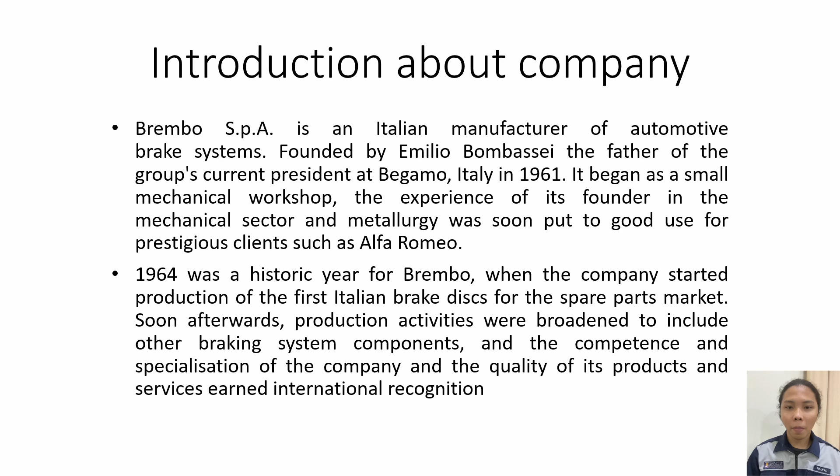Its successes include the production of the first complete braking system installed as standard on Guzzi and Laverda motorcycles in 1972, the Formula 1 supply for Ferrari in 1975, the first aluminium caliper and the first carbon disc in the 1980s. So basically, Brembo is the first company that managed to produce the first aluminium caliper and the first carbon disc during the 1980s.

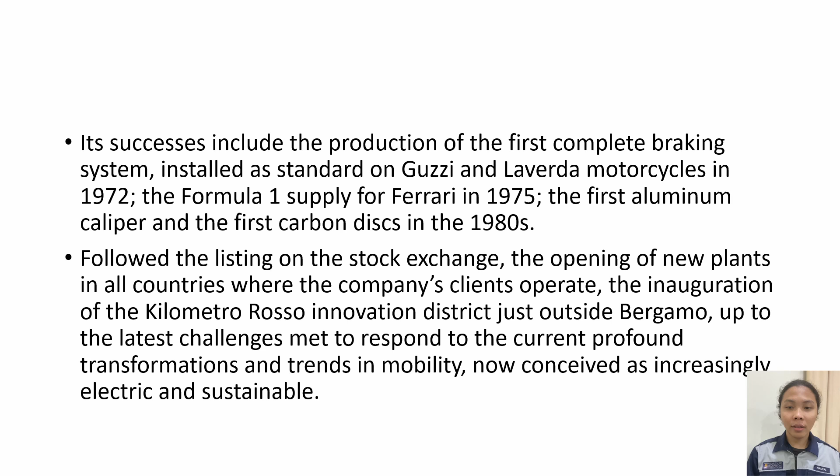It's a good achievement. And then followed the listing on the stock exchange, the opening of new plants in all countries where the company's clients operate, the inauguration of the Kilometro Rosso Innovation District just outside Bergamo, up to the latest challenges met to respond to the current profound transformation and trends in mobility, now conceived as increasingly electric and sustainable.

And then here's another one: the company's new plant in Escobedo in the state of Nuevo Leon, Mexico. The new manufacturing site in Escobedo is a real turning point for Brembo operations globally, following its global strategy of localizing product and process innovation, service and cooperation close to its customers. Brembo continues to distinguish itself from other suppliers.

Escobedo is one of the company's more modern and cutting edge aluminium caliper plants. The facility features state-of-the-art manufacturing processes that combine high efficiency with the latest technically integrated solutions.

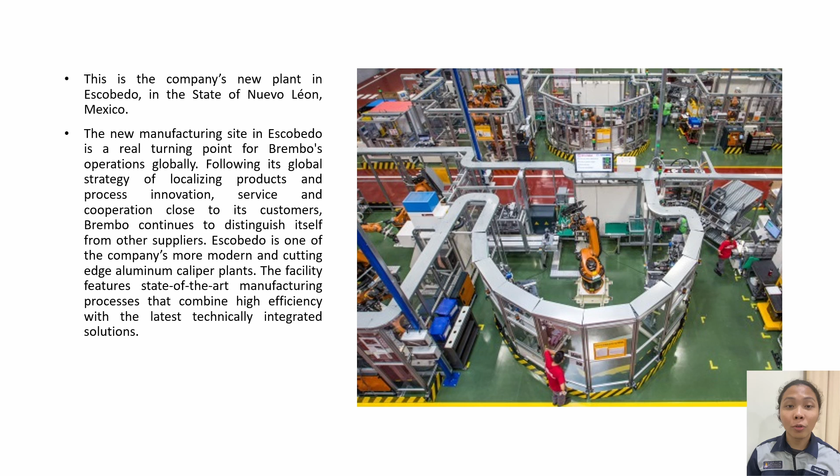So Brembo designs and manufactures each individual part of the braking system. Brembo brake discs are the industry benchmark for innovation and quality. Brembo calipers embody state-of-the-art design and performance, and Brembo brake modules offer unparalleled integration and efficiency for maximum reliability, comfort, and durability. So that's all from my part of the introduction.

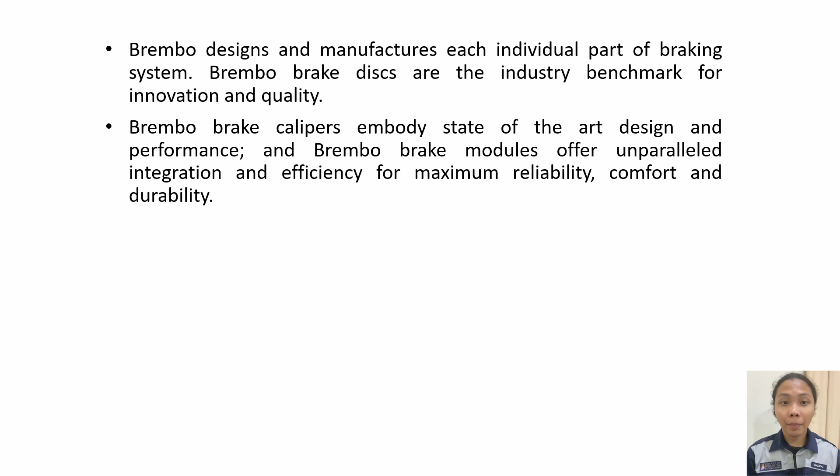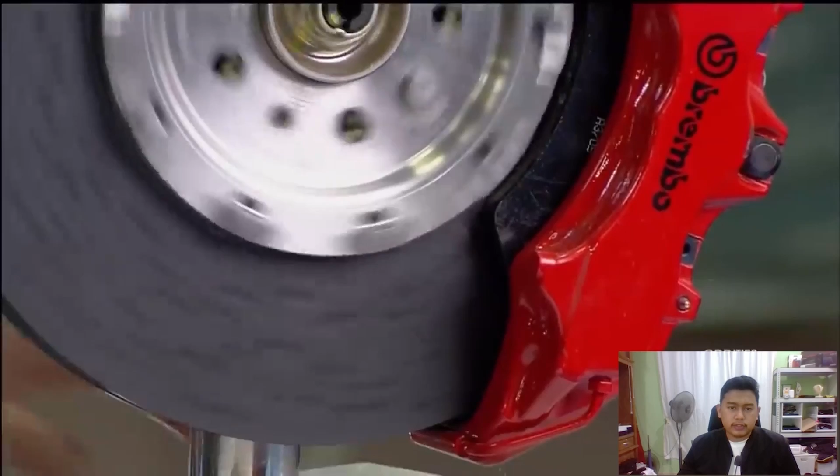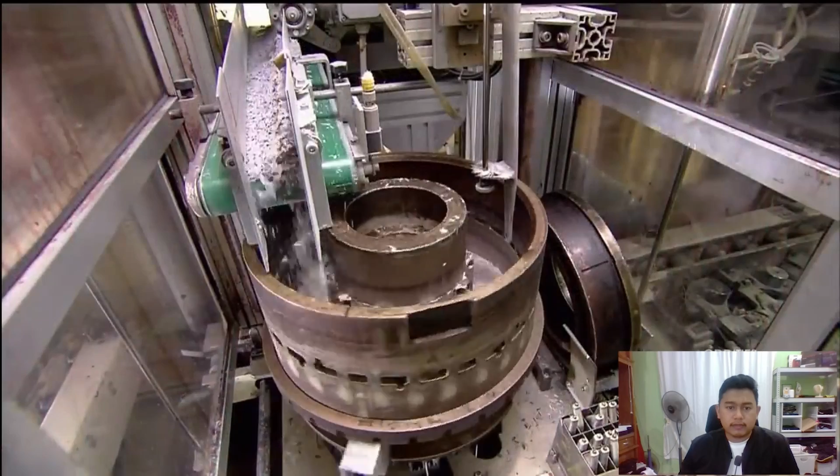Next, I will proceed with our video presentation on the manufacturing process. The first step in the manufacturing process of the Brembo disc brake is that the raw ingredients will be prepared for the mixing process, and the materials involved in this mixing process are heat molded resin and chopped carbon fiber in order to create a high strength composite material.

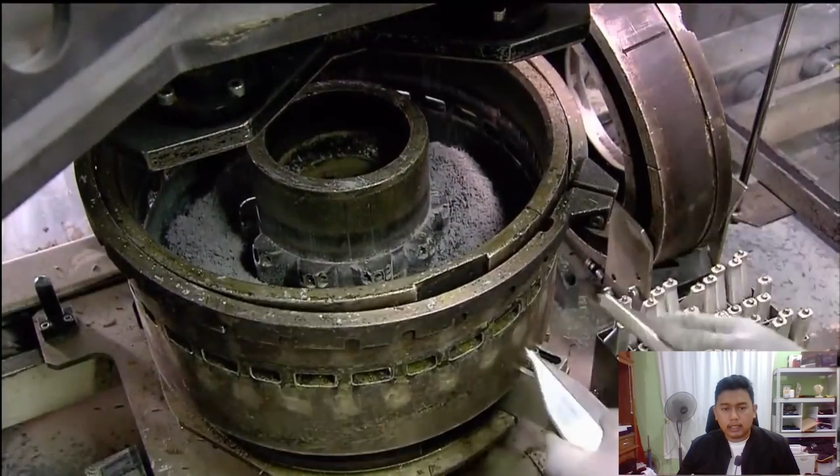The mixed ingredient will then be poured into the aluminium mold until half of it, and after that the half filled mold will have a slotted belt installed around it, and then aluminium cores will be inserted into the slots, and the cores function for ventilation purposes. Next, the remaining space of the cavity will be filled again with the mixed ingredient, and at the same time a roller will be placed on top of the cavity to level out the ingredient.

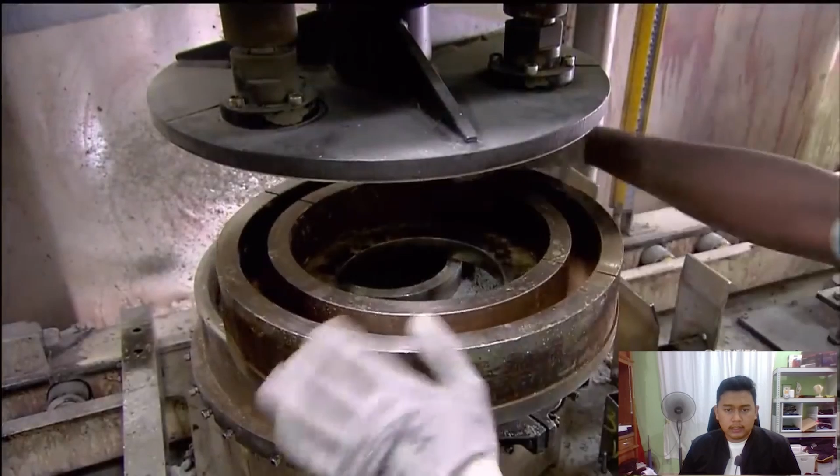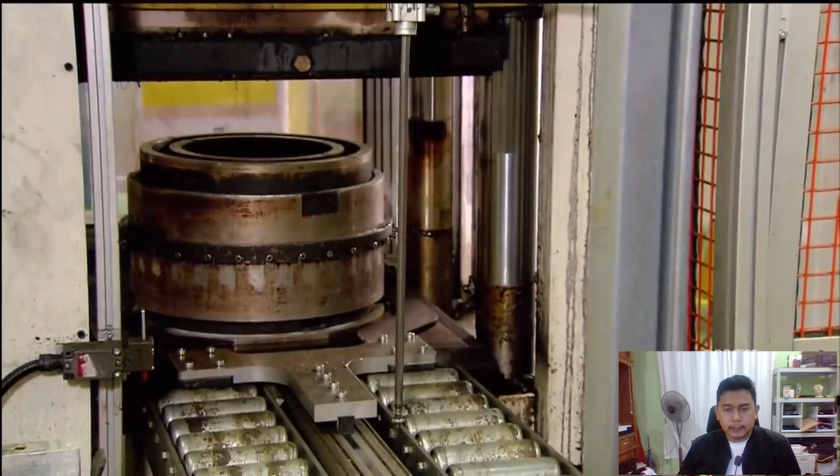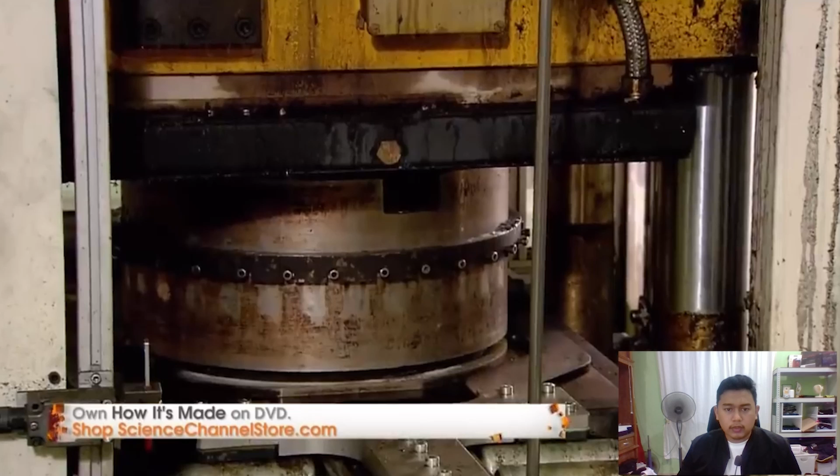After that, the mold is closed and pressed lightly to compact the fill before entering a larger press, which will apply 20 tons of pressure, and at the same time the mold will undergo a heat treatment up to 204 degrees Celsius. This particular step will transform the resin powder into plastic and compact the carbon fiber, and then the mold is cooled until it is ready for the extraction process.

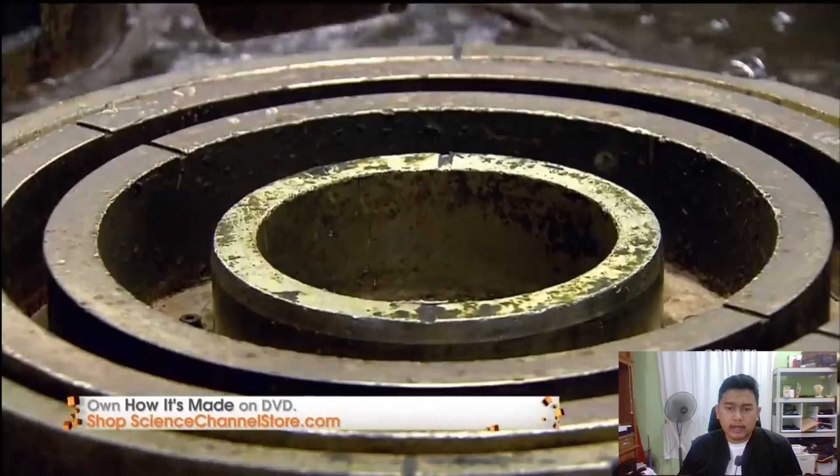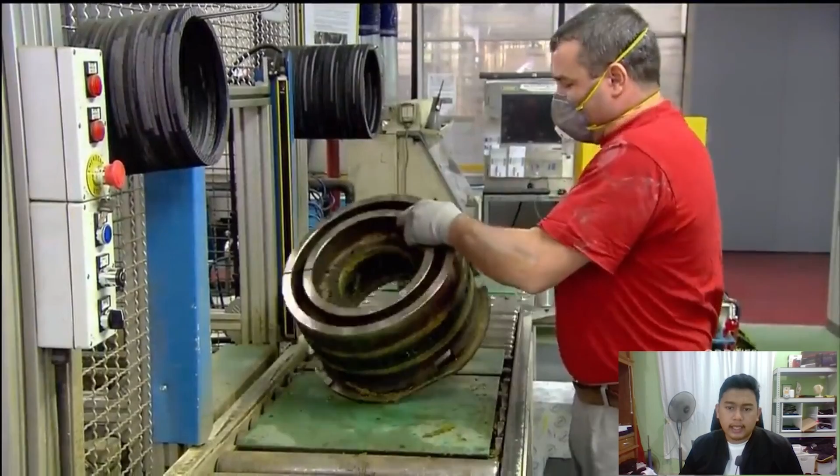Before extracting the disc, the mold will be submerged in water for 5 to 8 minutes to ensure that the disc is completely cooled down, which will enable the workers to pull out the core. So the next step will be continued by SAUFI.

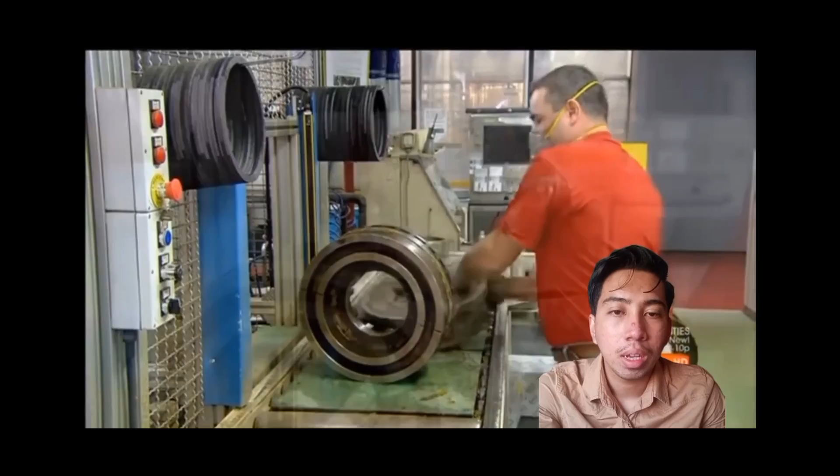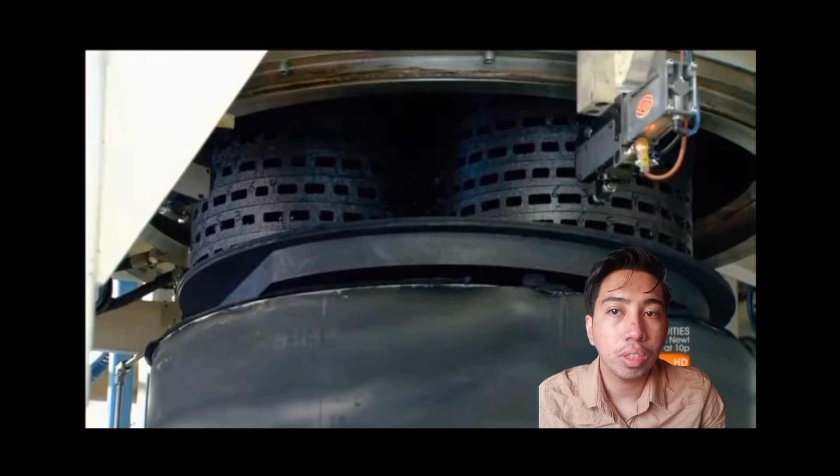After the disc is removed from the mold, a computer guided machine will smooth out the rough areas. The tiny ventilation holes will also be drilled to make a perfect hole. After that, the disc ring will be heated in an oven with a temperature over 1800 degrees Fahrenheit for over 2 days. This process will change the plastic into carbon.

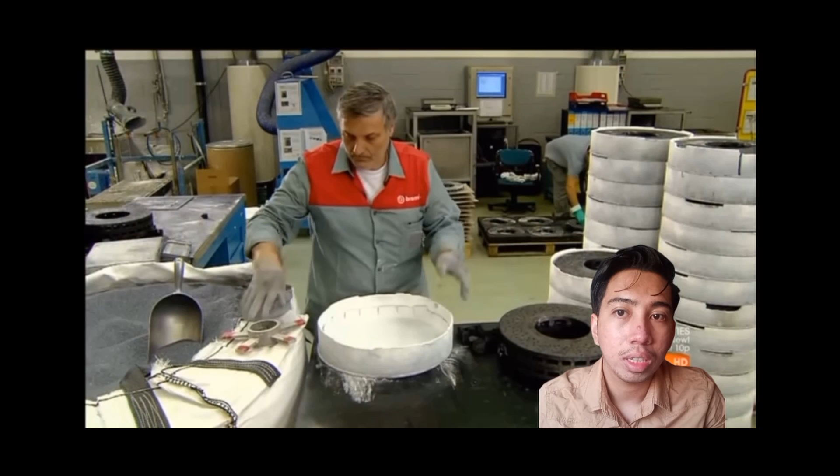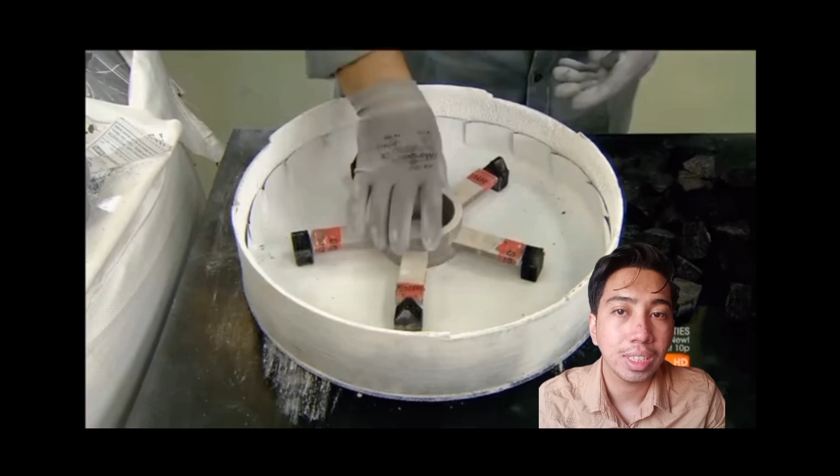Next process, a crucible that has a high heat resistance is put on the table, and then 5 mounts are placed inside the crucible. The disc ring will be placed on the mount.

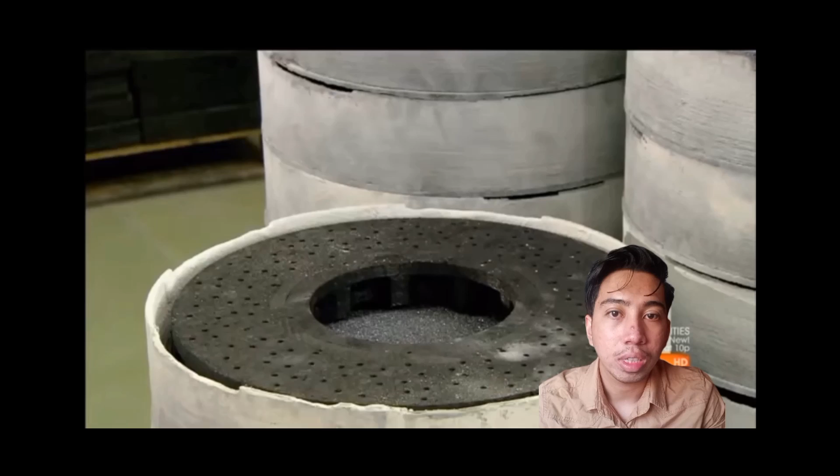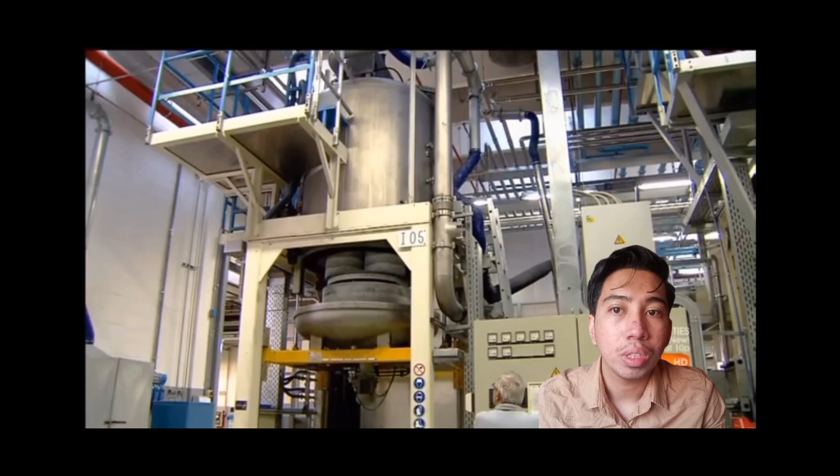Next, the ceramic material, which is a fine silicon powder, will be poured into the middle of the funnel. After that, the crucible will be heated in the oven that has temperature over 3000 degrees Fahrenheit for over 24 hours. This process is called a melting process because this process will melt the silicon powder to produce a silicon carbide.

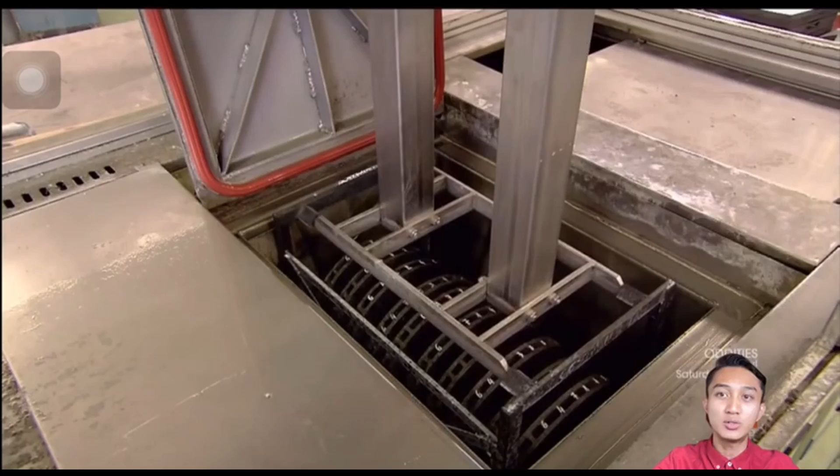For finishing process, the brake disc goes into paint coating process. The product goes into a chamber and receives a coat of protecting paint. The paint protects the carbon from oxidizing because at high heat, oxygen burns carbon and this will destroy the product.

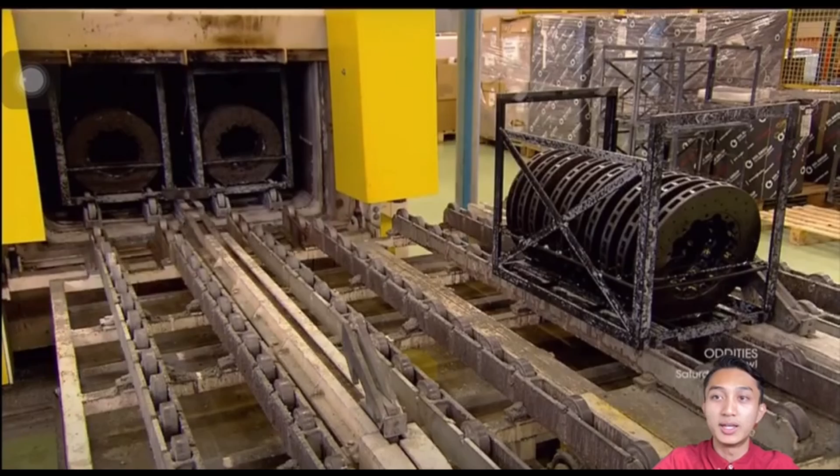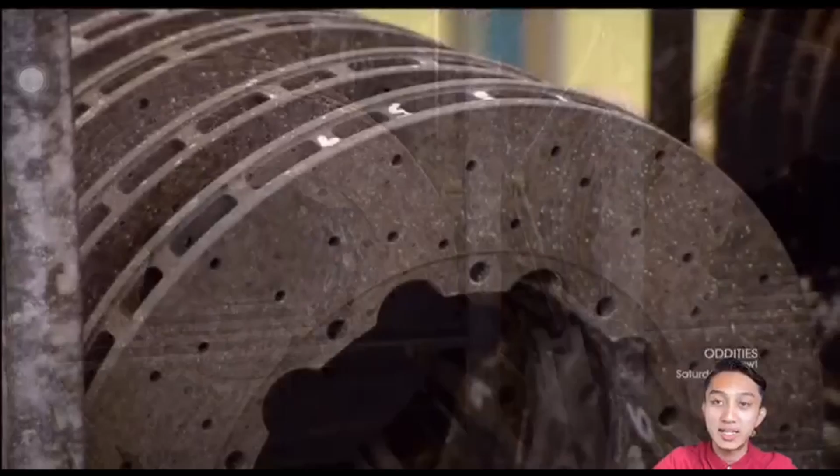Next, the Brembo disc brake goes into antioxidation treatment. The purpose of the treatment is to extend the life of the disc brake. Lastly, the disc brake goes into a sanding process performed to clean white residue on the brake disc.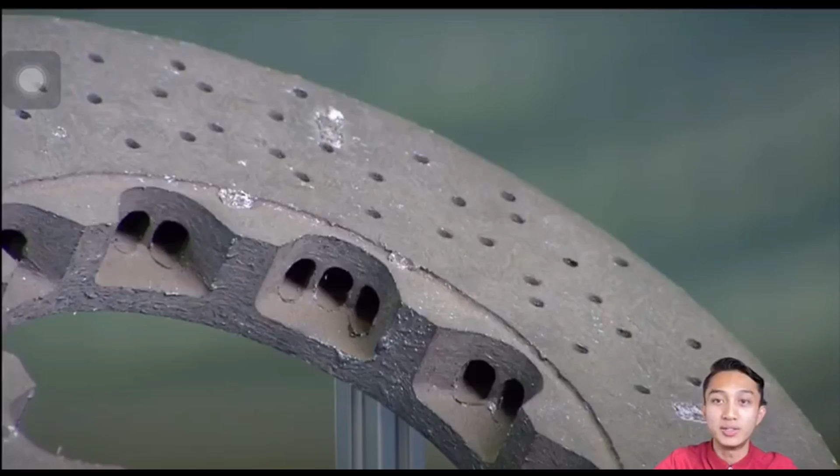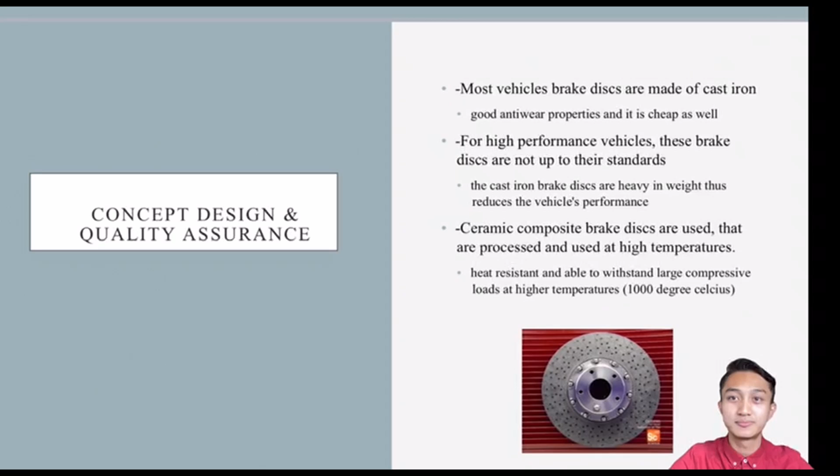For design concept and quality assurance. In most vehicles, these brake discs or disc rings are made of cast iron, which is cheap. But in certain other cases, such as high-performance vehicles like Formula 1, these brake discs are not up to the standards of high performance because the cast iron brake discs are heavy in weight and so reduce the vehicle's performance to a particular extent.

In such a case as this, ceramic composite brake discs are used that are processed and used at high temperatures. These ceramic composite brake discs are known to be heat resistant and able to withstand large compressive loads at higher temperatures up to 1000 degrees Celsius.

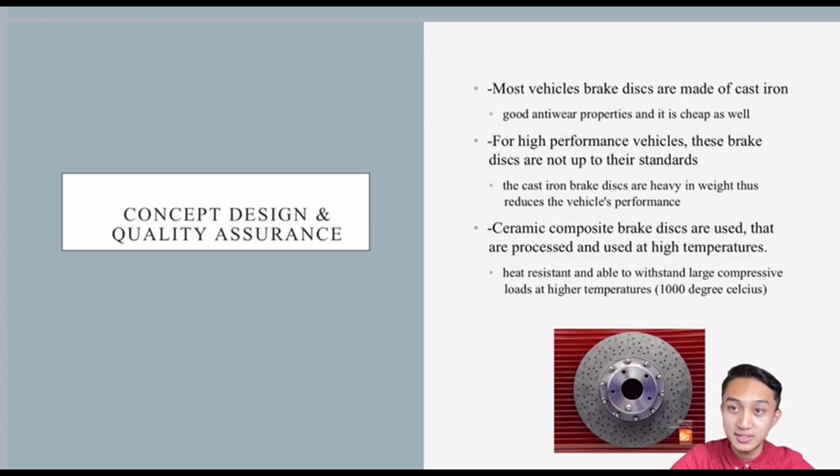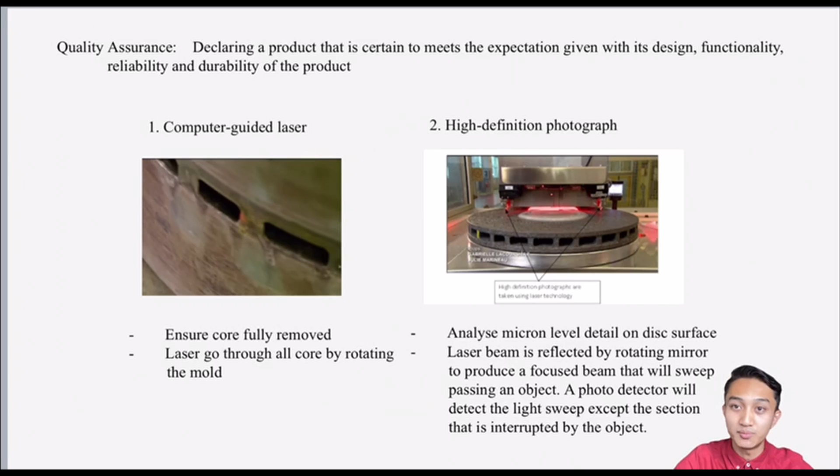Quality assurance is declaring a product that is certain to meet the expectation given with its design, functionality, reliability, and durability. In order to achieve all those goals, Brembo uses a computer-guided laser to ensure the core is fully removed. The mold rotates on a rotating machine and the laser will pass through the side of the rim in a static condition and will detect the presence of the core.

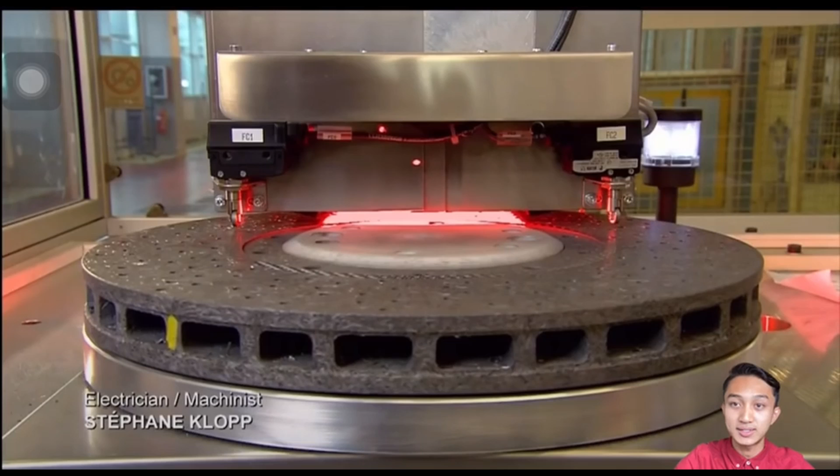All the core slots should be empty as it will go to the next manufacturing process, which is extracting the mold. High-definition photography is also used at Brembo to analyze micron-level detail on the surface. As a result, the surface of the rim will be smooth with no defects. A computer machine will thoroughly inspect the ring surface by taking high-definition photographs to further examine the molecular and crystal structures to detect any defects.

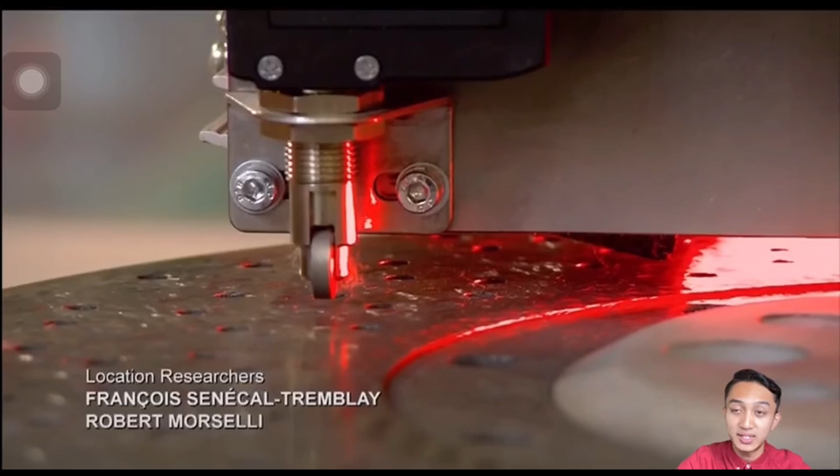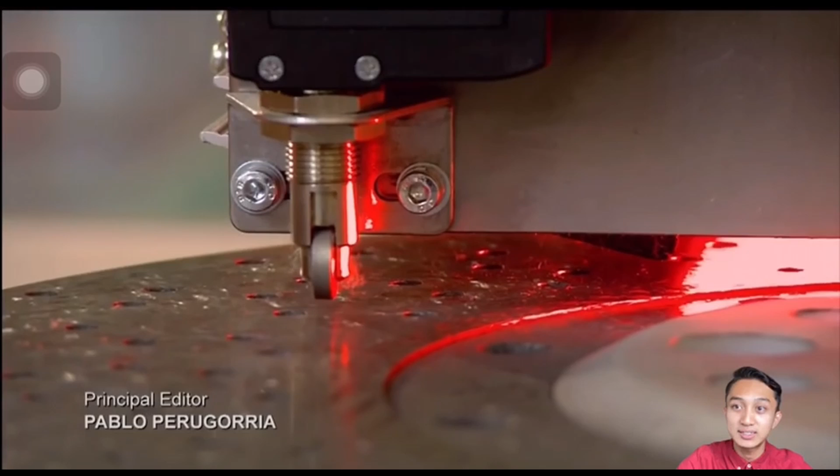How does it work? Well, the laser beam is reflected by a rotating mirror to produce a focused beam that will sweep past an object. A photo detector will detect the light sweep except the section that is interrupted by the object. The interrupted time is measured and related to the size and shape of the object.

Next, the products produced by Brembo. And for your information, Brembo is one of the companies in the world that manufacture equipment relating to braking systems. Hence, Brembo offers their services in designing and manufacturing every individual part in order to ensure that their products can deliver maximum performance and offer excellent reliability and durability.

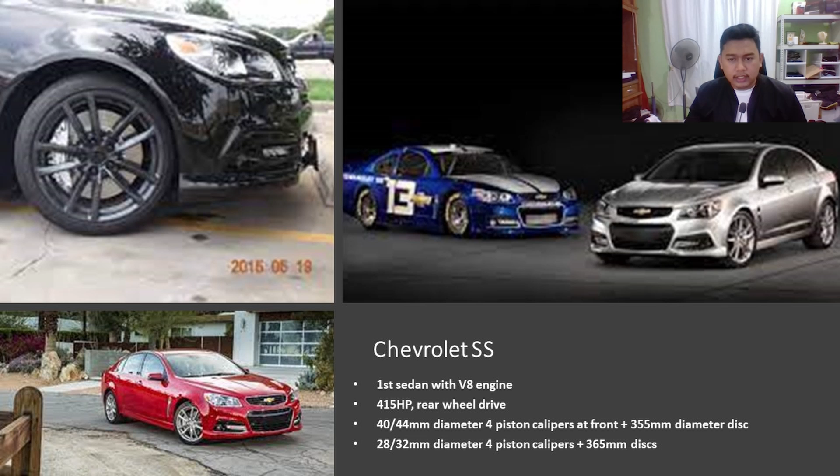At this point, Brembo does not only manufacture products for cars, but also specializes in professional racing and bike braking components. So, here are some of the high-performance cars equipped with Brembo discs and calipers. The first model is the Chevrolet SS, the first sedan with a V8 engine, producing 415 horsepower with rear-wheel drive, and Brembo has produced oversized brakes in order to match the horsepower produced by the Chevrolet SS.

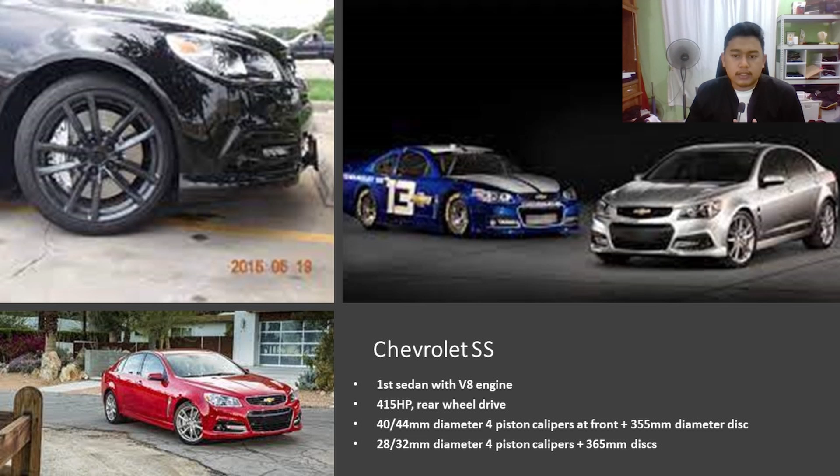For this car, 40 to 44 mm diameter 4-piston calipers are placed on the front to work in conjunction with a 355 mm disc. On the other hand, at the rear wheels, 28 to 32 mm diameter 4-piston calipers will be combined with a large 365 mm disc.

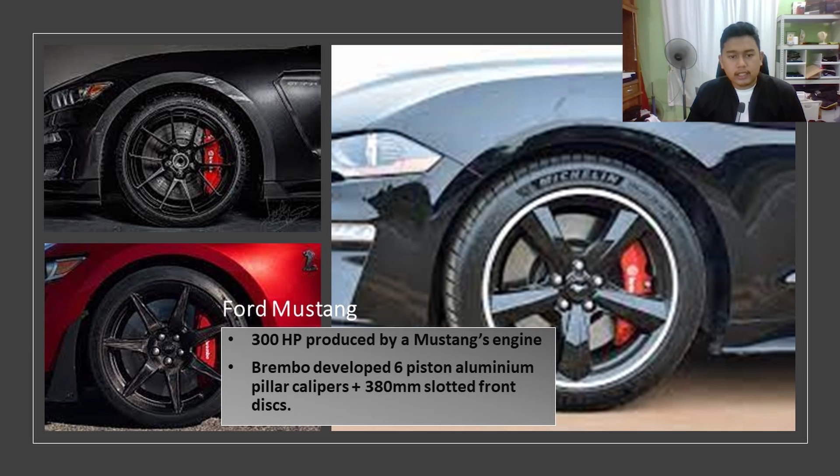The second model is the Ford Mustang, which produces 300 horsepower, and in order to cater to this horsepower, Brembo has developed 6-piston aluminium pillar calipers with a 380 mm slotted front disc.

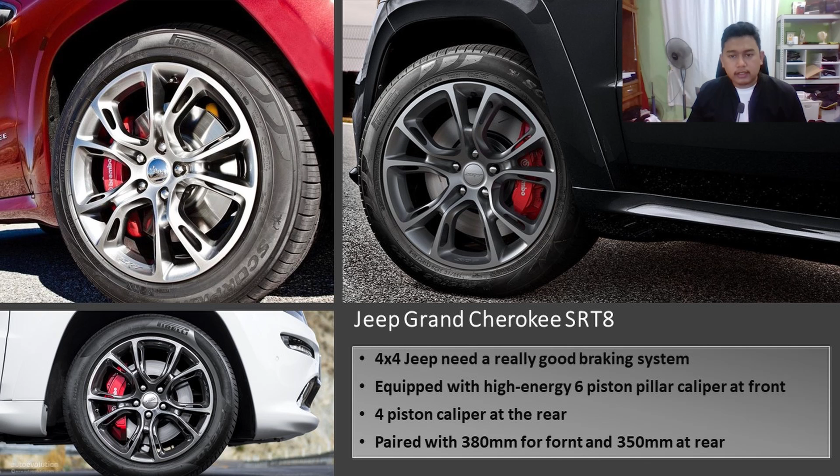And the next is the Jeep Grand Cherokee SRT8. The power generated by this 4x4 requires a really good braking system, so Brembo equipped the car with high energy 6-piston pillar calipers at the front and 4-piston versions at the rear. These calipers are coupled with 380 mm and 350 mm discs respectively. Next, I will show you the bike models for Brembo equipment.

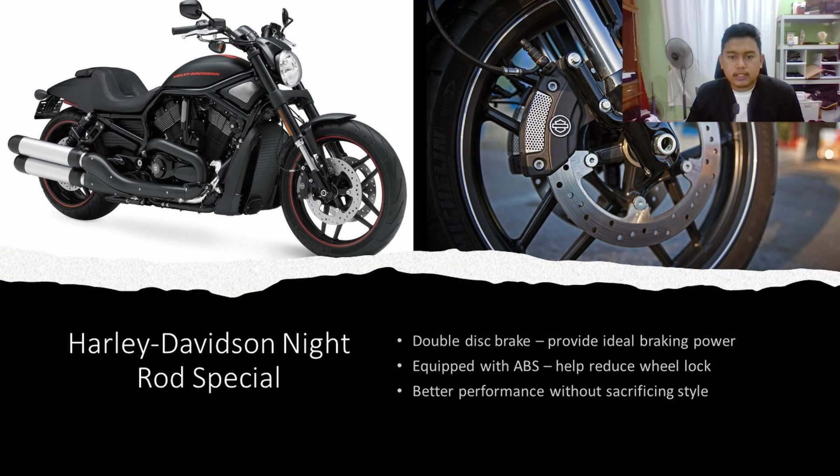And the first model is Harley Davidson Night Rod Special. For this motorbike, they use double disc brakes in order to provide ideal braking power. And the ABS installed will help reduce the tendency of wheel lock in sudden brakes, which gives better performance without sacrificing the style. Next is Kawasaki Ninja H2.

This motorcycle is equipped with 330mm diameter and 5.5 thick semi-floating disc, which will be paired with Stylema calipers. And these calipers consist of 4 pistons, 30mm diameter each. And all of this equipment is to match the 231 horsepower and 310 horsepower for Ninja H2 and Ninja H2R respectively. Next product is for racing equipment provided by Brembo.

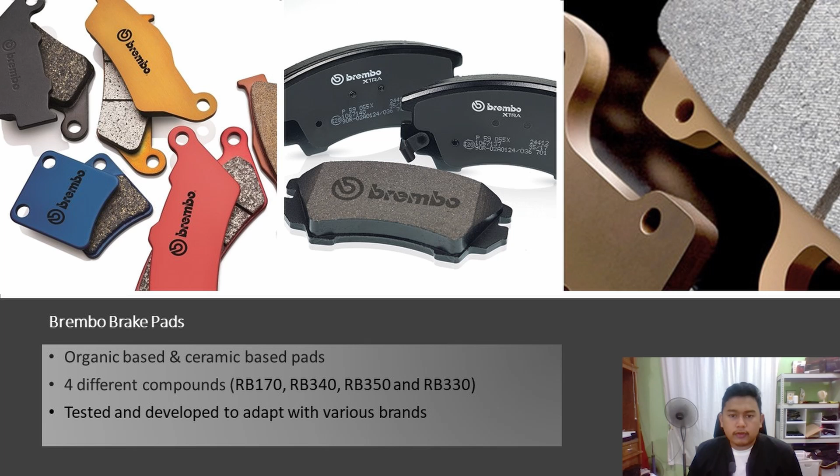And the first product is brake pads. For your information, Brembo also produces brake pads of organic based and ceramic based, available in 4 different compounds, which are RB170, RB340, RB350 and RB330. And all of these pads were tested and developed in order to adapt with various combinations including Brembo calipers and other brands. The second product for racing equipment is the disc itself.

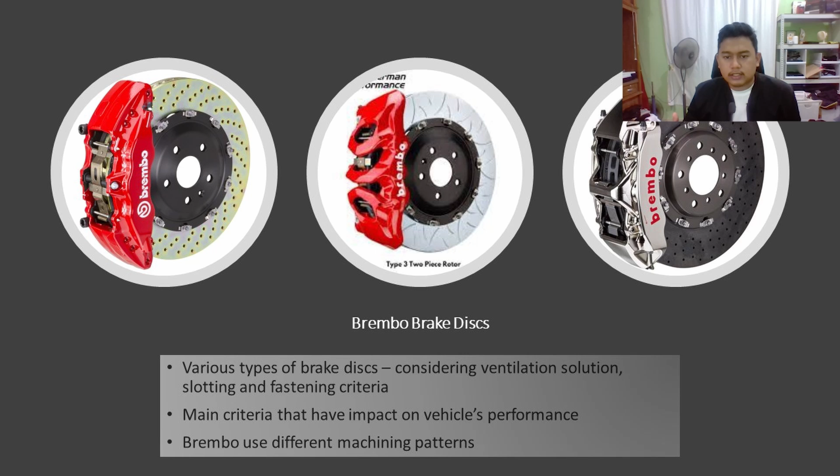Brembo produces various types of brake discs that differ in ventilation solution, slotting and fastening. These three elements will cause an impact to the vehicle performance during the competition. Hence, Brembo has come up with various patterns in machining the disc during the manufacturing process. And the last product for racing equipment is calipers.

Brembo manufacturing also includes calipers that are made by forging process or billet machining that come with 2, 4 or 6 pistons. And also, these calipers can be fitted with fixed or mobile bridge.

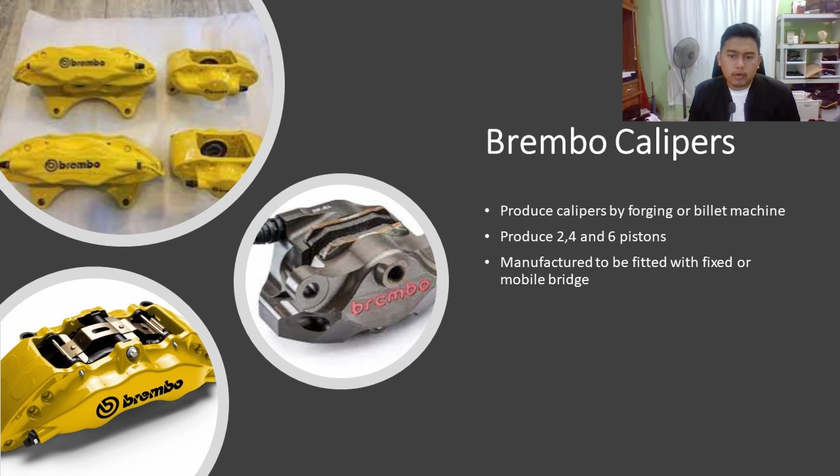In manufacturing process, there we have manufacturing defects where the manufacturer did not do the manufacturing correctly. This can happen when a product is manufactured incorrectly and it deviates from its intended design. In this research, there are very few defects that we can find because all the processes in this manufacturing are computerized and checked through the computer guided machine.

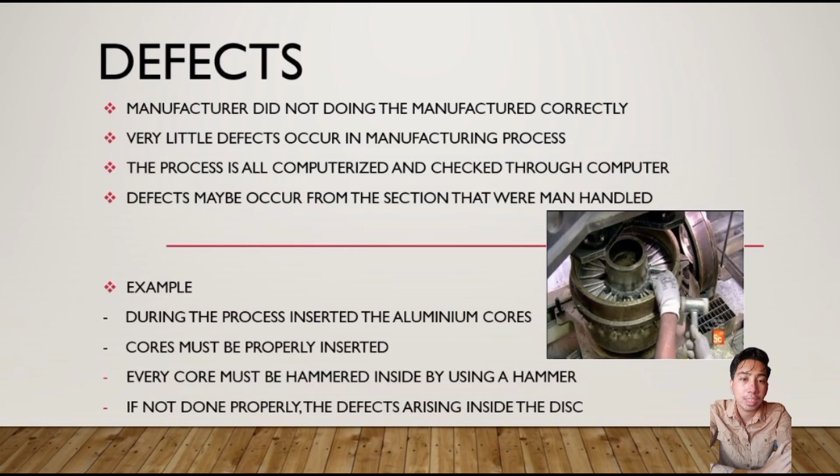In this manufacturing, there are defects that can occur from the section that were man handled. For example, when inserting the aluminum core into the mold, this core must be inserted properly and must be hammered inside using a hammer. If not done properly, there will be defects arising inside the disc. Next, another defect is broken brake disc. It can happen when the product is extracted from the mold, or this defect can occur when doing the compression process. If the compression was over compressed, it can cause the defect to the product.

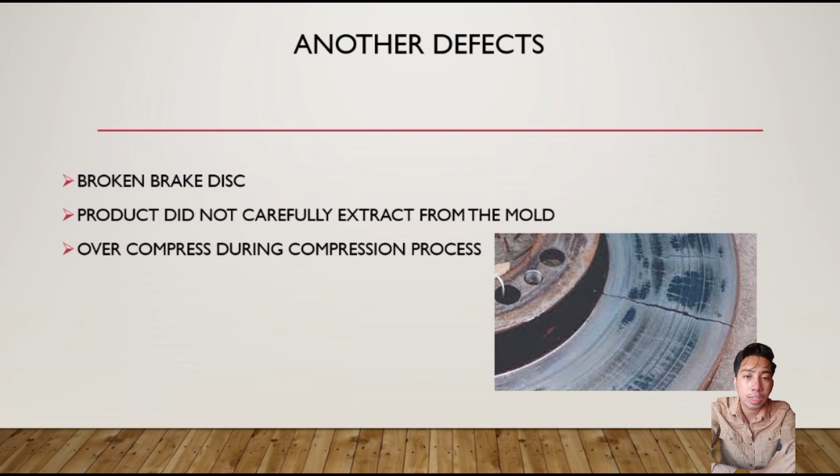I'm gonna present the discussion. I will suggest modification technology in the making of the disc brake. A modification to the technological process of ventilated disc brake machining was made. The main purpose of the modification was to increase the productivity by changing machining parameters for 3 turning operations and 1 reaming operation, and by using tools with ceramic plates. The machining parameters for sintered carbide tools range within cutting speed 200 to 700 meters per minute and feed rate 0.2 to 0.6 mm per revolution respectively.

Some of these parameters were maximal on account of the capabilities of the control systems. As a result of the modification, the time of machining a brake disc was shortened by 20% on average. The application of ceramic plates increased the productivity by reducing the frequency of replacement while meeting the quality requirements for the brake disc.

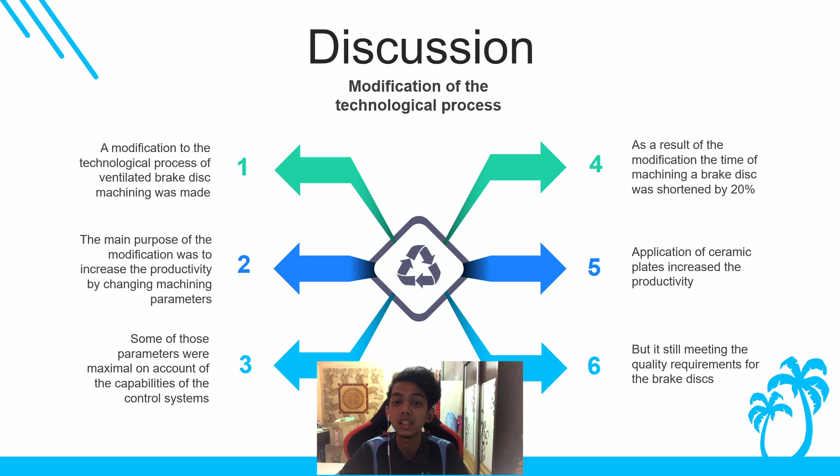A problem that a company might face in the making of this brake is human skill. To overcome this problem, a company needs to hire trained or experienced workers, so this problem can be controlled. But hiring experienced workers is difficult nowadays because no one can become experienced in a short time without training. So my suggestion is a company needs to train their workers until they are professional.

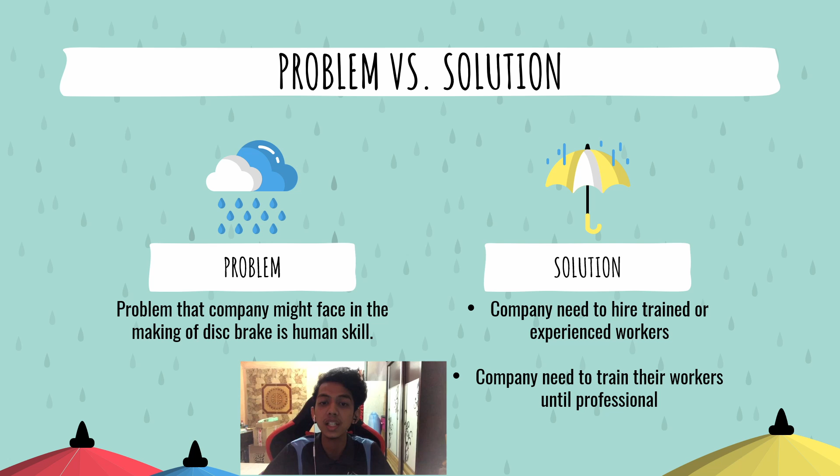One of the processes involved in the making of this brake is the melting process. Another product that uses this process is glass. Now I will explain how glass is made. At a high level, glass is sand that's been melted down and chemically transformed. If you have ever been to the beach, you know exactly how hot sand can get while remaining in its solid form. The kind of heat necessary to transform sand into a liquid state, eventually becoming glass, is much hotter than any sunny day. To make sand melt, you need to heat it to roughly 1700 degrees Celsius, which is approximately the same temperature a space shuttle reaches as it re-enters Earth's atmosphere.

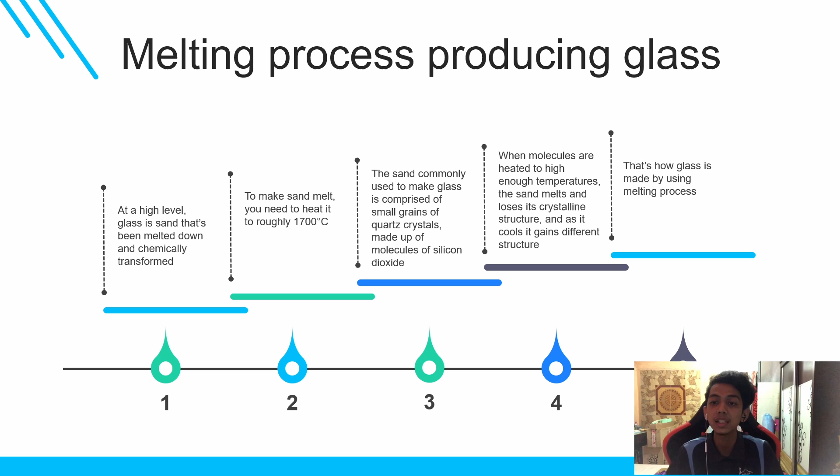The sand commonly used to make glass is comprised of small grains of quartz crystal made up of molecules of silicon dioxide, which is also known as silica. When these molecules are heated to high enough temperatures, the sand melts and loses its crystalline structure, and as it cools, it gains an entirely different structure. The structure on a molecular level is somewhere in between a liquid and a solid. This in-between state is known as an amorphous solid, which means it has some of the crystalline structure of a solid coupled with the molecular randomness of a liquid. That's how glass is made.

For continuous quality improvement, the duration that was set, which is 10 to 15 minutes, was quite inadequate for us to include important content. Thus, it made it harder for us to choose the intended content and we had to cut off some of the findings to meet the requirement. Our suggestion is that the duration should be longer. Instead of producing a presentation video as a task, we can deliver the task as a full written report. This is because we can include much important information regarding our chosen product.